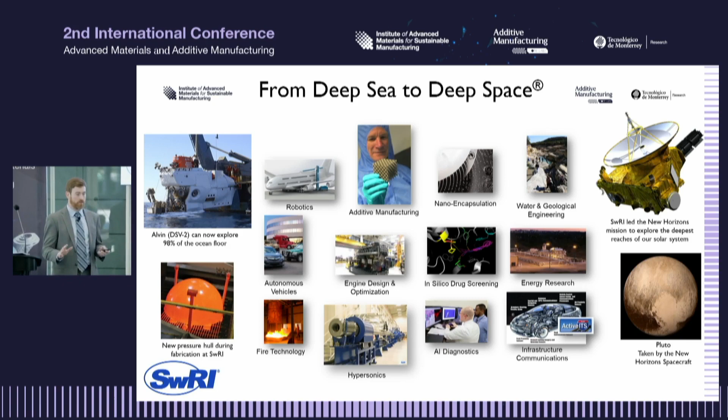But today, what we're interested in is additive manufacturing. So what are we doing in additive manufacturing? It's a little silly here because I've organized things into past, present, and future. When I say past, I'm going to start with about 2017 - someone's going to laugh at me and say that's not past, but I think that highlights how fast this technology is moving and accelerating. 2017 doesn't mark the beginning of us researching in this area, but it does mark the beginning of us purchasing our own metal additive machine.

And that's also - I'm going to talk mostly about metal additive, powder bed fusion. That was kind of the start of when we purchased our machine, and that led to a lot more synergy within our own organization, because we were doing several projects in additive manufacturing prior to that time, but they were all kind of disparate groups doing these research things.

And so then we came together and have this focus of advancing additive, bought our own machine, and that really led to a lot more connectivity within our institute to go after bigger challenges. So I'll talk a little bit about that, and then I'll talk about present.

Since getting our metal AM machine, where have we really focused on trying to address different gaps? I'm going to talk a little bit about qualification of materials and certification of AM parts, with more of a flavor for aerospace. And then finally, I'm going to talk about the future.

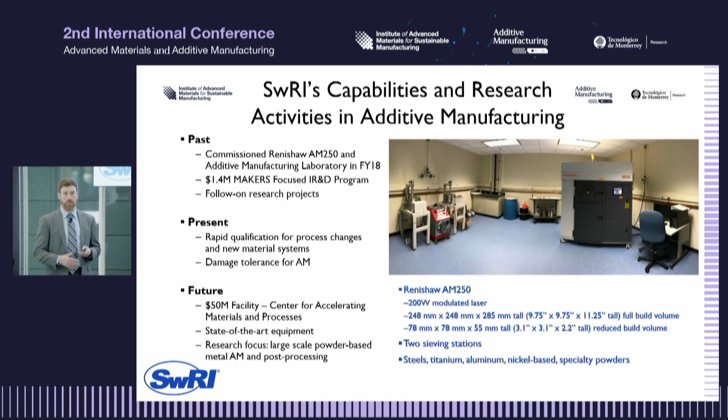So the past, maybe I should back up here and show, this is that machine. This is our humble beginnings here when I'm talking about us being involved in additive. This is our initial Renishaw AM250, our initial additive manufacturing lab. Just a small little space that we've carved out. So you'll see as I talk about the future, how far we've come in terms of investing in this technology and trying to solve some meaningful problems.

So the past. I mentioned with the purchase of our additive manufacturing machine, that really got us engaged with, or really got us as an institute internally really connected with who's doing what in additive, how can we have more synergy. We actually did an internal research program, a $1.4 million internal research program called MAKERS. That was Metals, Additive, Kickoff, Emphasizing Research Synergy, MAKERS. The idea of this, again, was to create synergy and work together to tackle bigger problems than just being a bunch of little units going after smaller projects.

We also wanted to demonstrate, we wanted to learn and demonstrate our capabilities. So we invested in 7 funded projects. This was actually a process where we had people propose research ideas. We had, I think, 22 submissions, 11 invited proposals, and essentially boiled that down to 7 funded projects from various applications.

I'm going to walk through very quickly each one of those, but we really felt like this sort of kickoff program leveraged a lot of our core competencies. I won't read all those off, but I'll just highlight a couple. In material science, we have a world-class surface engineering group. We also do a lot of modeling, computational modeling, life prediction, and non-destructive evaluation and structural testing. So I'm going to jump into each of those 7 projects.

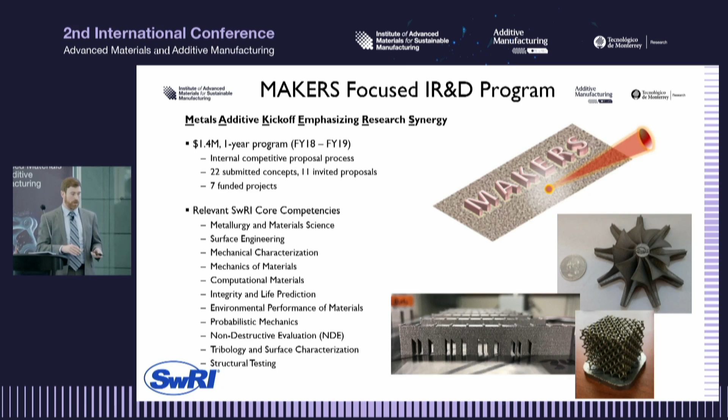I'm going to hit those pretty quickly, just to show you how we were starting to build this breadth of understanding in additive, and we were able to springboard from that. So the first one here, our first project was utilizing additive manufacturing to enhance liquid cooling, and this is an automotive application. I'm sticking to my cards because hopefully this mic's not on, but I'm sticking to my cards here because I don't want to spend too much time on each of these. But if you have questions, please let me know, I can get you in contact with the people that worked on these projects. I was involved in this MAKERS program.

I'll highlight the specific project I was working on. This is an automotive application, for cooling of cylinder heads. That's really limited to geometries that can be formed with sand cores or drilling between core sections. But in regions where there's high heat flux, there's still an issue with enhanced cooling, and you can really only do that by increasing the velocity of the coolant.

One thing this was looking at was if it's possible to utilize different geometries, shown there on the top left, to enhance cooling. You can also see some simulated images here. We actually went through the process of building these different geometries and testing them to see if we could use these unique geometries to enhance cooling that can only be manufactured with additive.

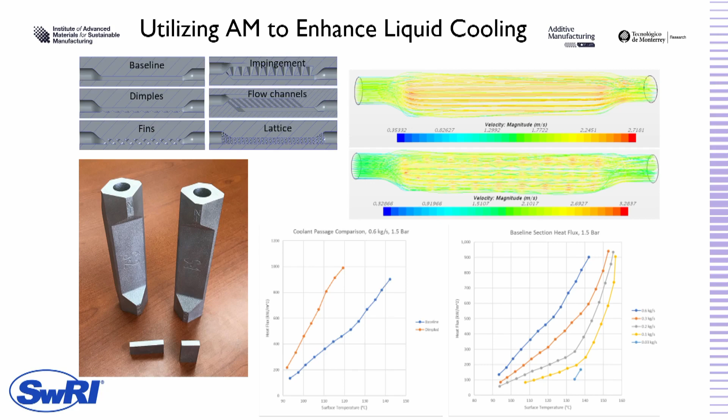We had some pretty good success here, and I believe we got some follow-on research from this project.

The second project is also related to internal cooling, but this is for radial turbine blades or turbines using additive manufacturing. The efficiency of radial turbines can increase through increasing operating temperature, but you have to have the material and enhanced cooling in order to run at those higher temperatures. This is for power generation.

One of the ideas was that conventional manufacturing methods such as investment casting use internally cooled axial turbines, but that's really difficult to apply to radial turbines where it's manufactured as a single piece. We've talked a lot about how unitized structures is a big reason to potentially use additive, and this was a case where we wanted to build in those cooling channels within the turbine itself.

We still have work related to this particular area based on some work that we did in this project. You can see some of the cool images of the turbines actually built on our build plate, and then some of the simulations that we did. I'm not showing it, but we also did some testing to evaluate whether those internal cooling channels were successful.

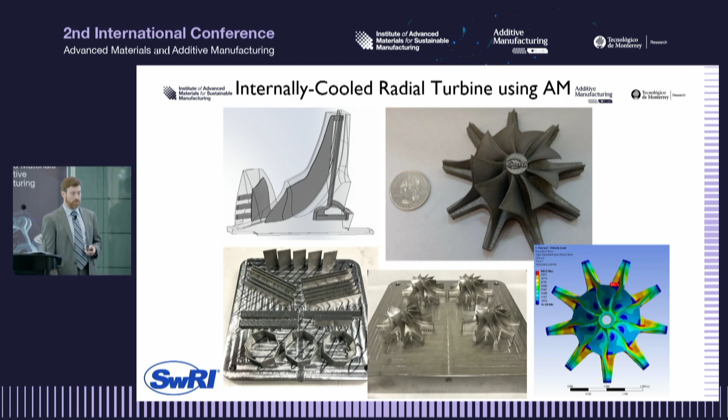Third project, this was more actually, I mentioned we like to stay in the applied research space. This was actually a little bit more maybe basic or fundamental. So this is additive manufacturing for shape memory alloys, and this was really interesting.

This is a nickel titanium material, and this is a unique material. It's demonstrating good shape memory or superelasticity properties. But the challenge is it's a really expensive material, and you can't get a lot of it. Additive's really good, right—

we minimize waste. So this was an opportunity to use this material, but also use the additive process. You've got a lot of knobs to turn with the additive process to tune the parameters to get the properties you want for different shape memory behavior.

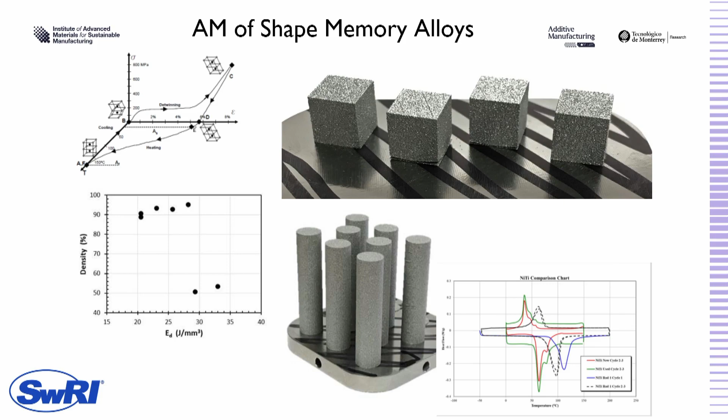So this was a lower TRL. We have not transitioned this to much of a higher TRL. It was a really interesting project, more high risk, high reward, and we showed some capabilities here, but still more research is needed for this to actually be something more commercially or production available.

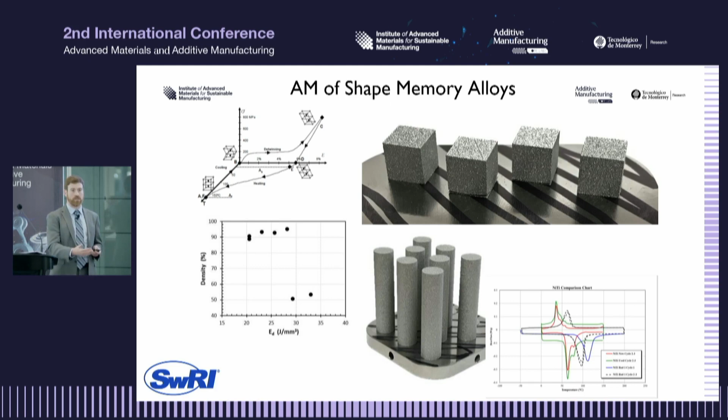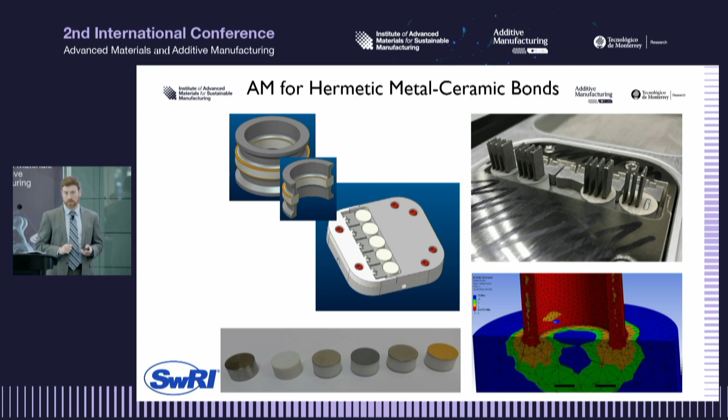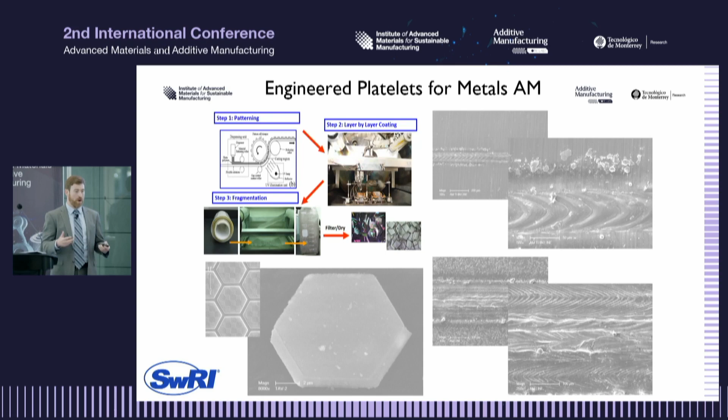There were some challenges with this in terms of transitioning it, because those platelets have to be properly oriented to get that good packing density. Otherwise, you have a propensity to have vertically aligned platelets, which can create additional voids and defects. So additional work is needed, but it's a very efficient process to create powders of unique metals.

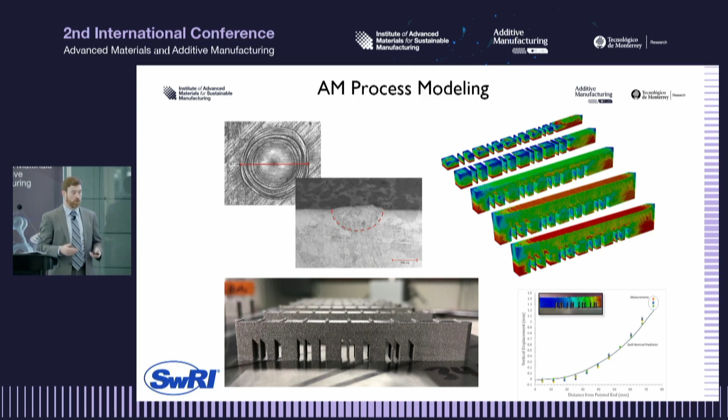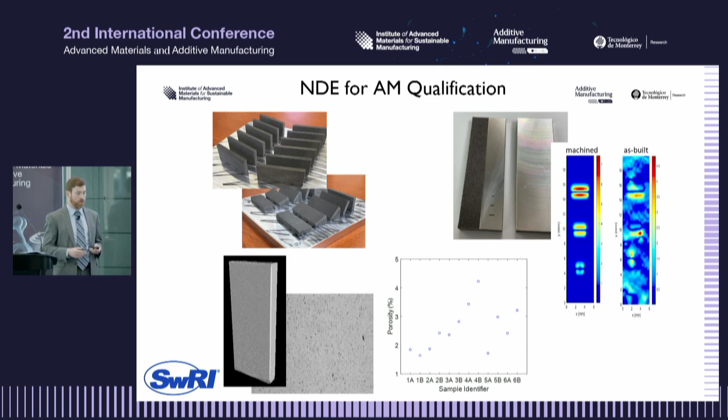So now I just want to quickly - I know that was a lot of information - that was establishing that we've got some core competencies, this breadth of things that we can do. What we wanted to try to do then is leverage that to get externally funded projects or additional internal projects. One of those was creating this process pipeline.

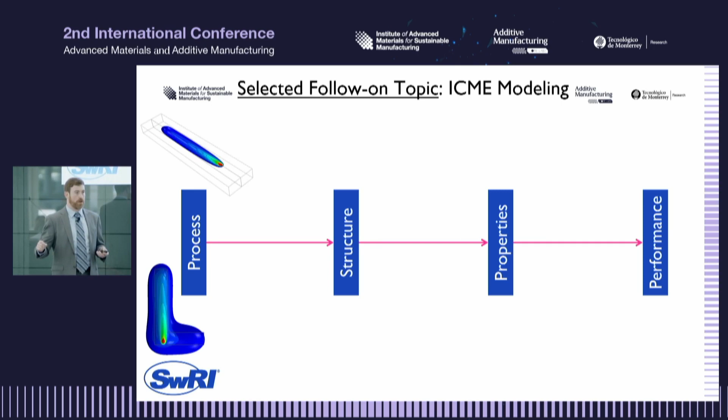I mentioned this going from process to performance, and these different models that you need to get there. We've already seen thermal process modeling of how that really localizes energy input by the laser. How do you feed that then into something like a thermodynamic model to predict things like average grain size or other microstructural features? How does hipping influence the microstructure?

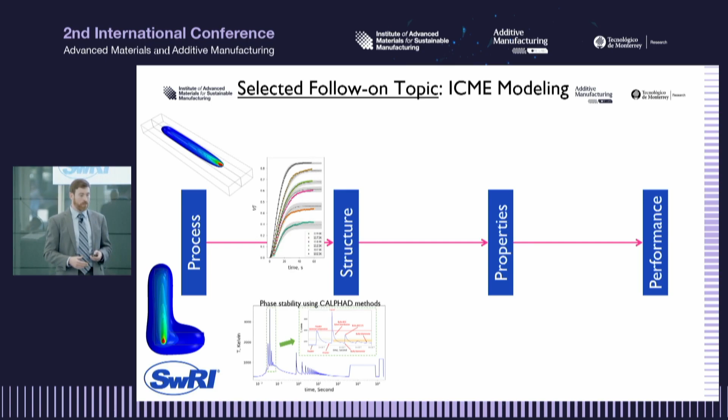Volume fraction - can we then, from the structure, predict, for instance, a stress-strain curve? And then can we predict residual stress? Can we predict yield stress? And can we understand what's the uncertainty in our prediction capabilities?

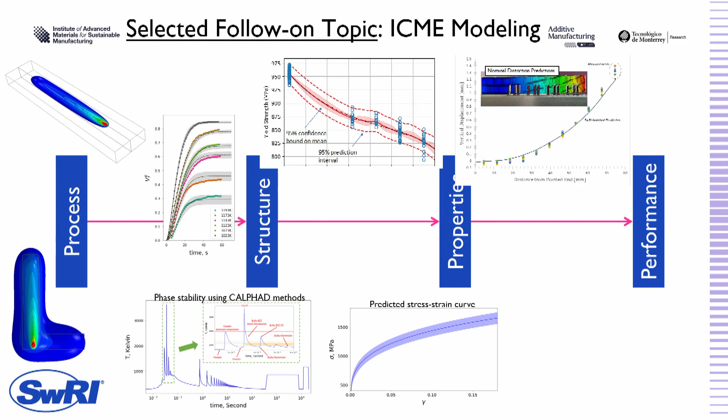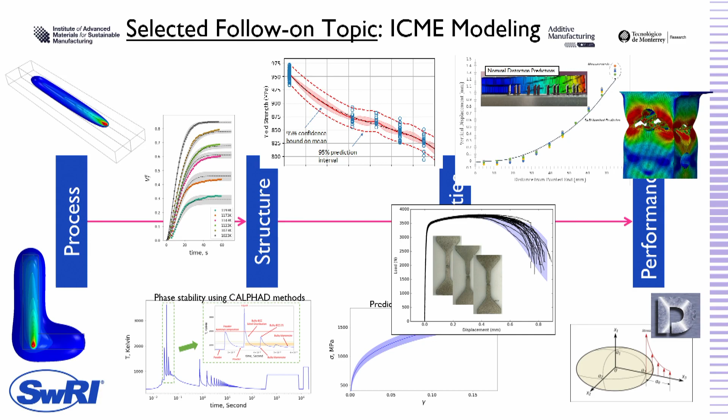And then finally, can we use those models to actually predict damage, fracture of the material, life prediction? That's really important to aerospace components when we're talking about fatigue. So I'll touch a little bit more on this last piece of life here in a minute as far as certification goes.

But first, where are we presently? So we did all that stuff at the beginning to gear ourselves up for helping. We want to help solve problems to make additive manufacturing more effective for the community. One of the big gaps we see right now is qualification of materials, certification of parts.

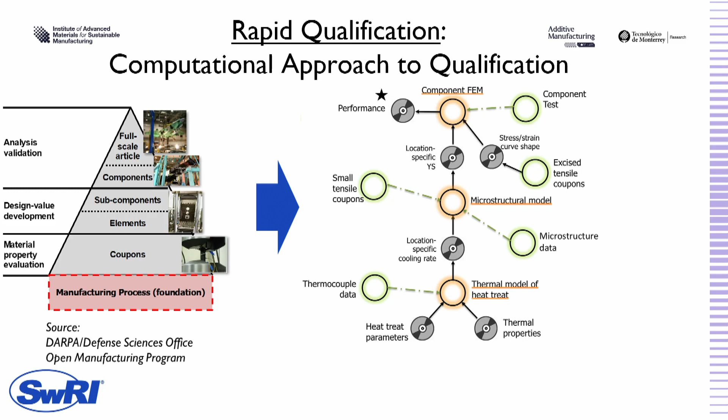The cool thing with additive manufacturing is that you're creating the material and the part at the same time. The challenge is you could come up with an incredibly unique material system, even in the ultra high temperature material space, where there's a lot of desire to use novel materials. But the process to get a new material qualified is at least three or more years, and that's on the low end.

So how can we use that process, performance, the ICME modeling framework, to reduce risk in new materials and also understand how to streamline the qualification process? What I'm showing here in this picture on the left is the building block approach.

Normally for qualification and certification, you have all this testing that you need to do, and it becomes very costly. On the right, I'm showing a schematic of all these different models we've put together and the associated data to make a prediction about part performance. One of the things we do in our group specifically is probabilistic analysis and understanding the impact of uncertainty—how different models and our data influence the uncertainty in our performance prediction.

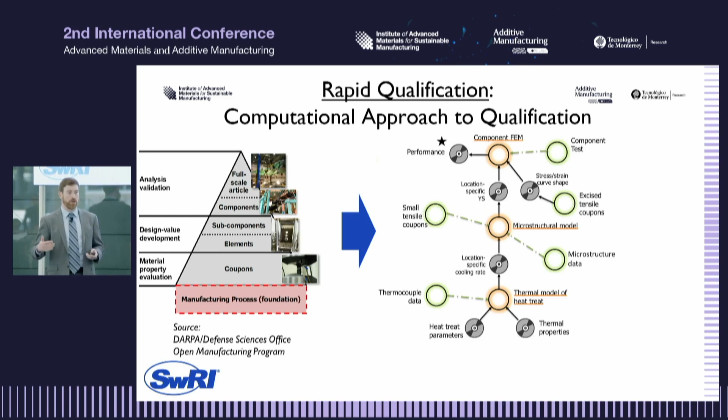We did a project with DARPA to demonstrate using this framework and this uncertainty quantification to rapidly qualify materials. The idea was, we're going to get a lot of test data, but how do we, in some cases, reduce that test data?

But maybe that's not of interest—how do we streamline that and really focus on where we need to gather more data to move the qualification process forward faster, and not spend time on areas where we don't need additional destructive testing because we're very confident in those properties? So we came up with a framework and an approach to qualifying a material and understanding how uncertainty impacts qualification.

I won't go through all the different boxes there on the right, but essentially what we're trying to do is give guidance on when you need more data. When is your probability of meeting a particular design criteria going to meet your specification? Or when do you need process control? Or when do you need a design change?

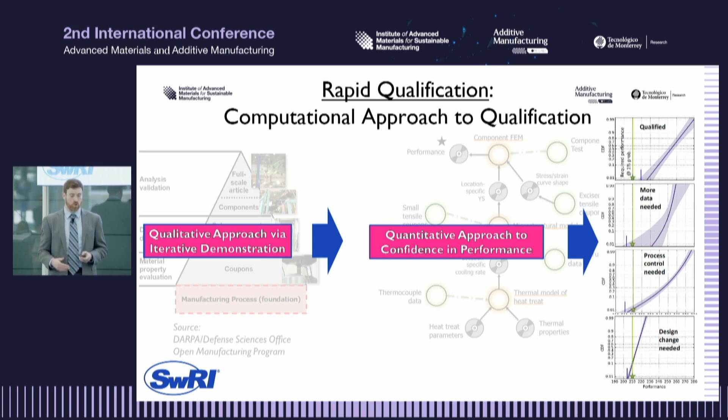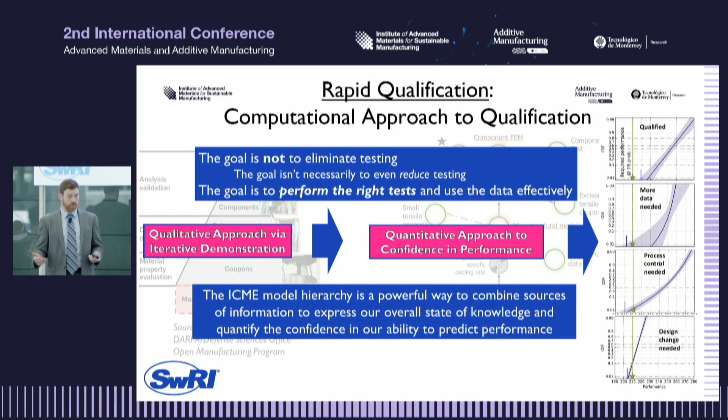This was a really successful project for us with DARPA and has led to additional work in this rapid qualification area. The goal is not necessarily to eliminate testing, but to perform the right tests and use the data effectively. The ICME model hierarchy is a powerful way to combine sources of information to express our overall state of knowledge and quantify the confidence in our ability to predict performance.

The other piece of this—so that was rapid qualification of a new material system. One of the panelists earlier said that by 2030, 10 to 15% of all aircraft components will be made from additive manufacturing. But one of the big gaps we see is actually using critical parts made from additive manufacturing.

Because you can think of this technology as making miles or kilometers of welds. And typically in a structure, where are we most concerned about defects? In the welds. So we can be really creative with this technology, but you can also generate a lot of defects. The idea is, how do we show that a part is structurally capable of being used in a critical application? Right now, I don't know of any really critical applications where AM parts are used on aircraft, because we don't trust them.

We don't trust them in fatigue. So the idea is, long story short, probabilistic damage tolerance, we think, is one way to help address this problem and in some ways close the design loop.

This is already being used. The FAA, the Federal Aviation Administration, already uses this for aircraft engines. You have to go through a probabilistic damage tolerance assessment to certify an aircraft engine, and you have to meet a certain risk level, and thankfully it's a very low risk level. But this is a very mature method that gives us a probability of fracture, and then we can compare that probability of fracture against a design target reliability to determine part safety.

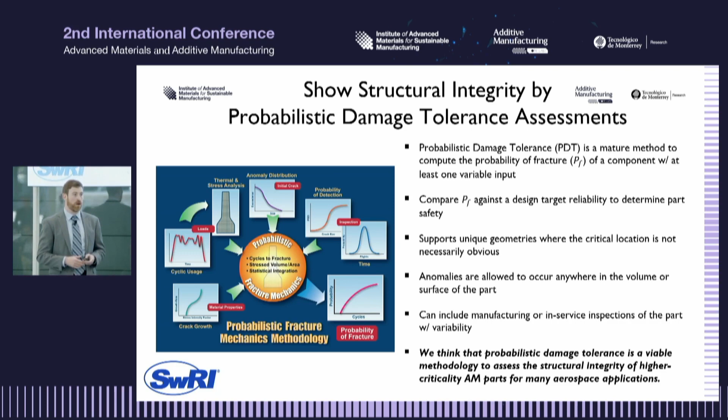But the idea is it could really be used for additive manufacturing. We think that probabilistic damage tolerance is a viable methodology to assess the structural integrity of high criticality AM parts for aerospace applications. We think this is a huge gap that needs to be addressed if we want to see the number of AM parts go up from, say, 10 to 15% to even higher, and actually be used for critical applications, not just fuel nozzles, for instance.

So how we're helping in this space is we actually have a commercial software called Darwin, design assessment of reliability with inspection, and it's a software we've been developing since 1995. We've worked really closely with the FAA, specifically for aircraft engine certification, but now we're trying to work with the FAA to apply this to additive manufacturing parts.

I said close the design loop because then you can go through this process of design, simulation, get to your certification or get to your probabilistic damage tolerance assessment, and feed that back into how can I reduce that risk in my design. So it makes this design feedback loop.

We've had continuous funding for this software since 1995. Again, it's commercially available. We've had about $50 million in funding, and it supports 2D, 3D models, a variety of different inherent and rogue anomalies.

Again, the FAA says, hey, you have to use a probabilistic damage software tool. They don't tell you which one to use, and there's certainly others, but this is one of the ones that's widely used across the aerospace industry to do that probabilistic damage tolerance assessment.

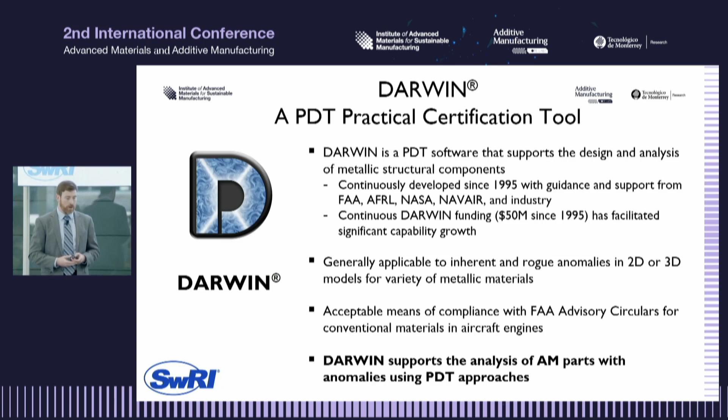So those are some things we've really been focusing on. There are other things we've been focusing on as well. I focused my talk on those because I'm a little bit closer to them, but I think those are real gaps. The material qualification, part certification, those are important gaps we're going to have to overcome because I think this technology can be more than just rapid prototyping. I think that's a good use of it in a lot of cases, but I think if we want to get to unitized structures that actually have meaning, we're going to have to figure out how to overcome these certification challenges.

So the future. I already kind of mentioned this earlier, so I let the cat out of the bag, but we are building a new $50 million facility, 3,300 square meters, dedicated to the vertical integration of manufacturing processes to accelerate learning. Essentially learn faster by bringing everything under one roof, creating a pilot production facility where, as we like to think of it, powder comes in one side, finished part comes out the other side.

And we're sparing no expense in trying to set up this facility, and we already have some committed contract work with the Department of Defense to build specific aerospace components, to research specific aerospace component production.

Again, we're not trying to make these parts and then sell them. We're trying to use this as a platform to help make people more effective with additives. So supporting industry can potentially use this sort of pilot facility to work on their design or understand post-processing.

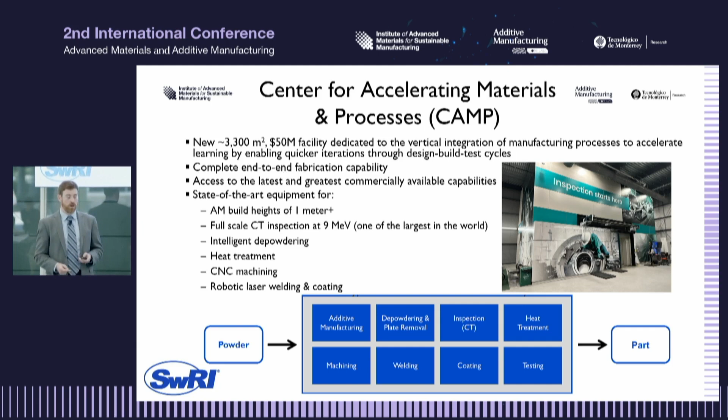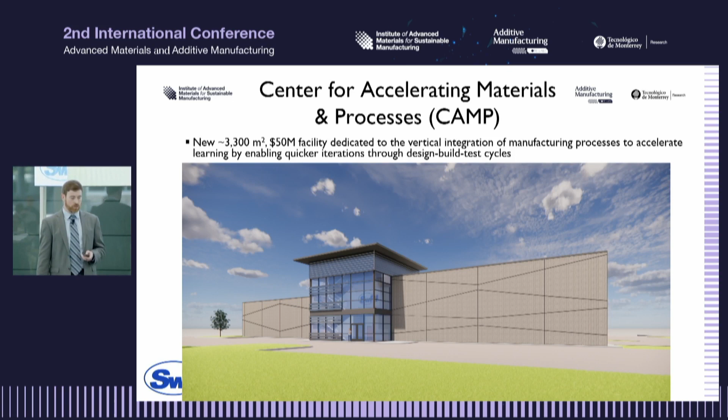That's supposed to break ground in either the end of this calendar year or 2024, beginning of 2024. That's just kind of a commercial rendering of the building. And it'll be a secure facility as well, so we can do classified research if necessary.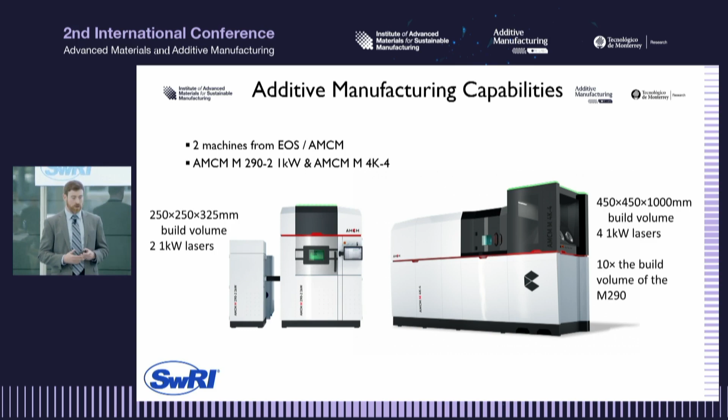One of the things we want to do with these machines as an initial research topic is understanding how do you go from maybe a smaller scale to a larger scale machine. Again, we've already got a contract with the DoD to look at real aerospace parts, or the manufacturing of real aerospace parts, and researching that.

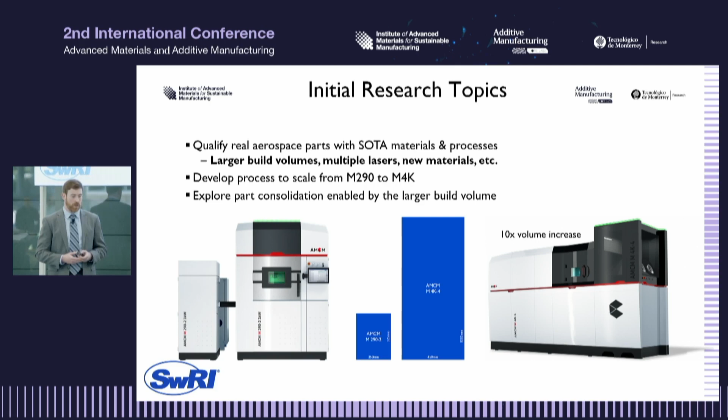We're going to be able to research with some state-of-the-art materials and processes. We're going to be able to explore part consolidation enabled by that larger build volume.

Some additional research topics - this was something I always think is interesting, and in some ways kind of trivial, is the process of depowderizing after you create a powder bed fusion part. So in some of these complex parts, you can get material that hasn't melted and it's stuck in the part itself.

And actually that process for some organizations can be a big schedule burden, because you're depowderizing, then you need a CT to see did you get everything out, and then you need to go back to depowderization. And sometimes if you don't have the CT in-house with enough power, you have to ship that out. So this could be multiple iterations. What we're going to try to do, since we have that all under one roof, is use this as an opportunity to learn how do you depowderize more efficiently to prevent that need to keep going back and forth.

Optimizing robotic laser welding techniques, improving thermal barrier coatings. I mentioned we have a world-class surface engineering group that does a lot of coatings for ultra-high temperature materials. We've talked about it today with the Women in Material Science panel about building good databases, material databases, and then using artificial intelligence or other means to explore those databases and develop new materials.

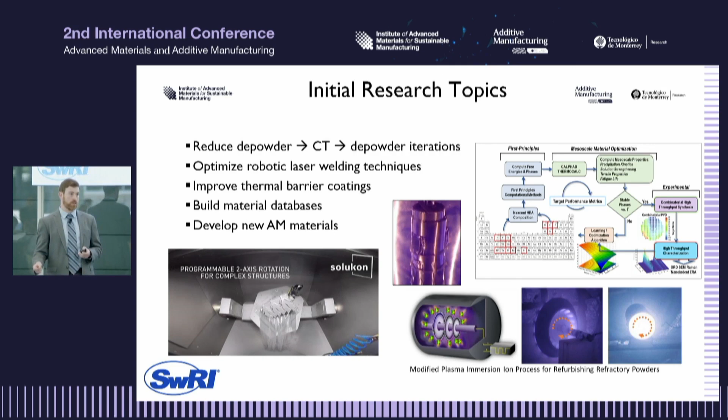And with that, I think the last thing I want to leave you with is just that we want to collaborate with you. So we are a 100% contract research and development organization. And so we want to help people be more effective with additive manufacturing. We don't want to take your place as a production. We don't necessarily want to do a ton of basic research. We want to be that bridge in the middle of how can we help make something useful with additive.